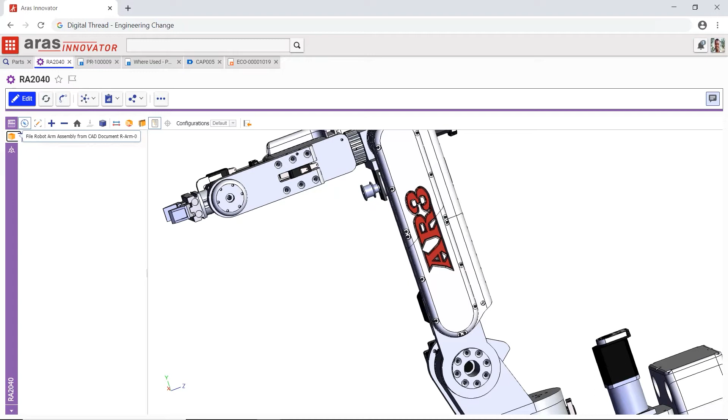Today, we're going to be looking at a fictional company called AR Robotics, who produces, sells, and services a line of robot arms for a variety of customer applications, including manufacturing, medical, and high tech. This is the AR3 robot arm, and we're looking at the bill of material structure or BOM structure. This concept has been around for quite a while, and most people in product development, including those outside of the engineering group, understand that this view is a relationship from one part to another, connections between parts.

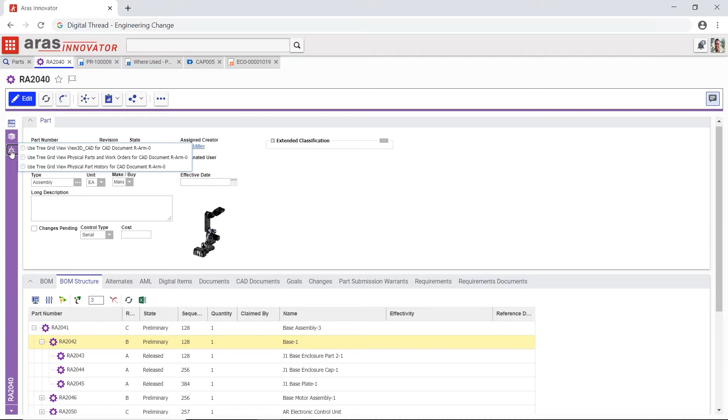Today's PLM systems might establish a few more connections, say from a part to an engineering change, but much of the remaining view of the product lifecycle, including requirements, simulations, maintenance, and quality data, remains siloed away, disconnected, unavailable. Once products are manufactured and deployed in the field, this limited connectivity concept starts to falter, since each serialized item, robots in this case, will eventually get maintenance service and possibly component and software replacements and upgrades.

To successfully capture and present this data for efficient use, the PLM system must track all of this information individually for each physical asset, creating a unique digital twin. Aras has created a platform and applications to allow all authorized users of the system to see each digital twin with a unique serial number and all of its unique configuration and history.

I'm looking at the dynamic product navigator, and I can see each robot arm with its unique serial number. Expanding each subcomponent, I can see serialized sub-assemblies as well as components. In this case, I can see a component that's been replaced with the old serial number and the serial number of the new replacement component.

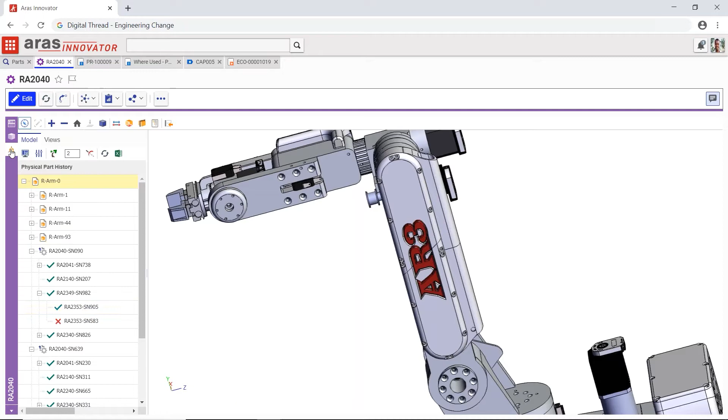Another view of the Aras Dynamic Product Navigator shows the serialized robot assemblies at the customer site with individualized work orders that have been issued against that particular unit. In this case, I can see this unit has had 2 work orders issued. And this work order had a problem report issued as part of its activity.

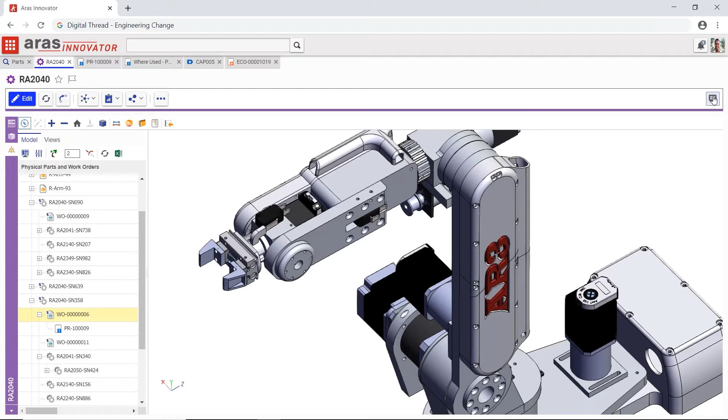Not only can Aras connect data from one piece to another, but it also has the ability to connect a discussion thread with each item in Aras. I'm looking at the visual collaboration discussion thread, which contains information such as rich content like markups, names and dates of the people that left the comments themselves, and even links back to items within Aras.

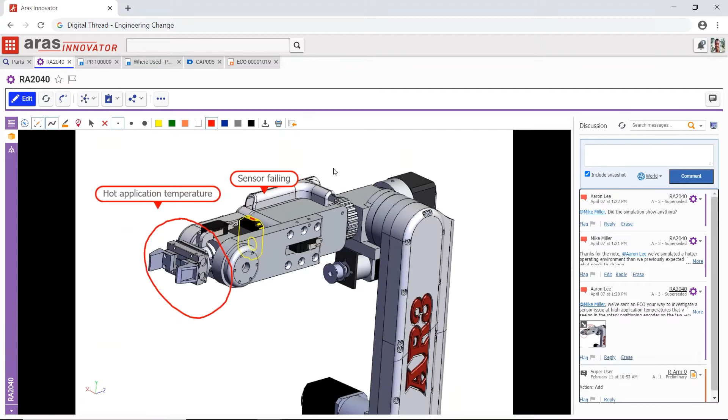I'm looking at this view here, and I think I want to leave a markup of my own. So I'm going to go to my robot assembly here. I'm going to stretch it out a little bit so I can see what I'm looking at. I can see these 2 components are the ones that I think I want to leave a note for. I'll go into markup mode. I can leave my note here. Let me put a couple leader lines in here to show exactly what I'm talking about.

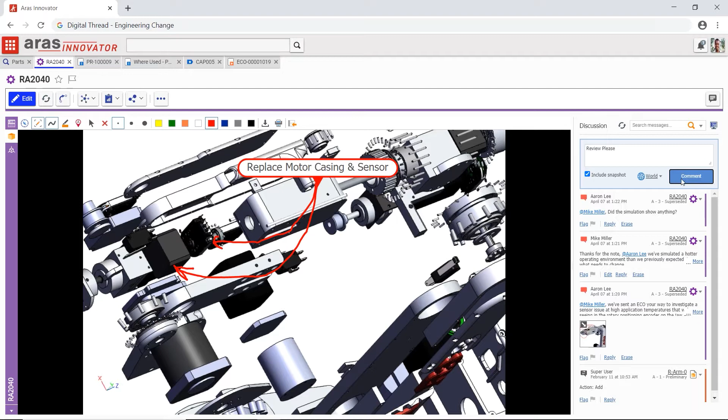I can leave a comment. When I leave this comment, it becomes a permanent record within the Aras Innovator system, connected directly to this item. And now you can see my comments have been left here today with a timestamp.

Let's go back and take a look at that problem report and use this as a kickoff point to see how I can look through the digital thread in Aras. I see my problem report here, and it's showing some errors on the diagnostics. The where used function shows that that problem report is connected to a corrective action plan. This corrective action plan is at the heart of the quality management system in Aras.

This has information about the problem description, the cause, effect, and eventually the effectiveness of the actual corrective action plan. It also has links to quality events, including problem reports. This is the problem report that brought us here, as well as other problem reports that have been submitted against this particular corrective action plan. It has containment events, such as hold notices and stop ship notices to stop the problem from continuing.

Analysis has root cause analysis, which I can see shows that there's a sensor overheating investigation ongoing. Corrective actions, including a rework order, and preventative actions, including ECOs and potentially quality documents getting issued to prevent this issue from occurring in the future.

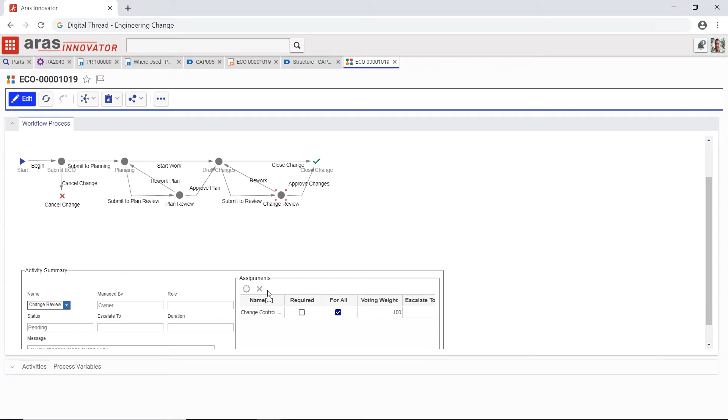Viewing the sign-offs lets me see a workflow history report showing each activity, its current state, who it was assigned to and completed by, how that person voted, in other words, which pathway through the workflow it took, and a time and date stamp of when each activity was completed.

Further down in the ECO, I see the impact matrix. This shows all of the affected items within this engineering change. First, I can see the rotor motor assembly being removed and being replaced by another assembly 2449, which is the replacement motor assembly. This new motor assembly has a new surface treated casing as well as a higher temperature sensor within it.

This impact matrix I can also see has automatically set the upper level parent assemblies to be revised. I can also see here that the electronic control unit has also been set for a revision. And within that electronic control unit, I see there's a piece of software. It's important that the software is connected with the electronic control module.

Within the software item itself, there are connections to other included software, such as firmware in this case. And generally, the software item itself is usually built externally to Aras, but I can see that there's live links within Aras to the repositories for the software. Those can include things like Jira, GitHub, or in this case, Bitbucket.

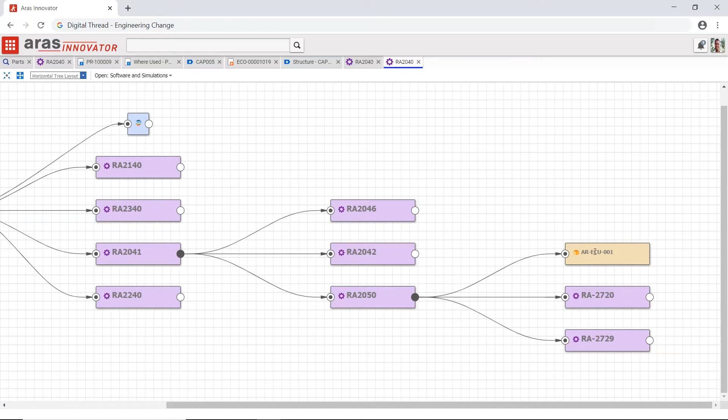Graphically, I can see those connections in the Graph Navigator view. I'll open the software and simulation view, and I can see my robot arm assembly, expanding this out to subcomponents and subassemblies. And further down, I can see the software item that I looked at earlier, and I can open that item directly from this view.

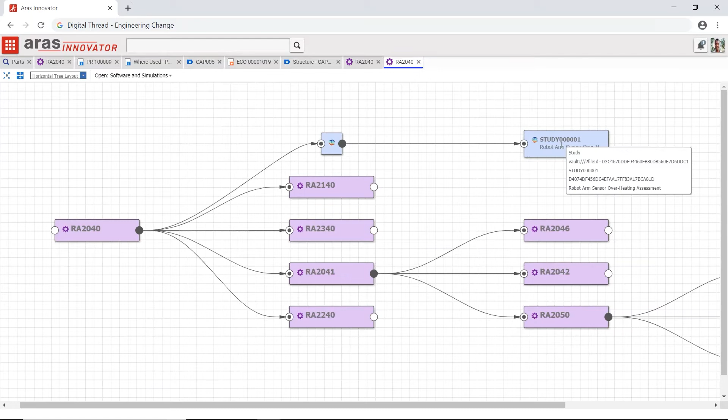Also in this view, I can see that there's a simulation study that was performed. I can get more information on this simulation study here. I can see this study is linked to some of the requirements that were originally used to develop this robot arm, as well as a link to the simulation itself that was done initially for this first design. Let's take a look at what's in the simulation.

The simulation is a thermal simulation. I see the link to the design that was used for the simulation. We can use design variables, in this case, such as the casing surface treatment. Here I see it's set to a value of polished. Environmental variables, such as the application temperature, with values and units that are specific to that item.

And finally, the results of the simulation are captured in this view as well. And I can see that the sensor temperature at the simulation, the result was 69 degrees Celsius, which, based on the requirement values of greater than -25 Celsius and less than 75 Celsius, that target was automatically set as true, meaning the target was met.

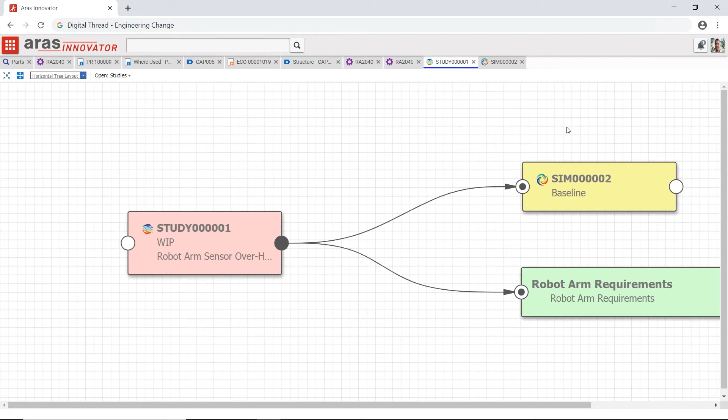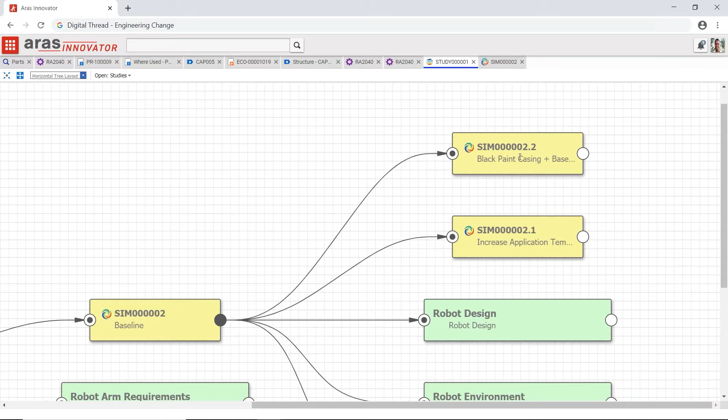Simulations are rarely created from scratch. And with our overheating problem, there were several other simulations run. One that changed the casing coating to a black paint, and a simulation that ran with an increased temperature.

Looking at the increased temperature simulation, I see that the environmental variable, the application temperature, was changed from the original value of 130 degrees to 220 degrees. And the result at the sensor temperature was 154, which means the target was not met. And so that was set to false.

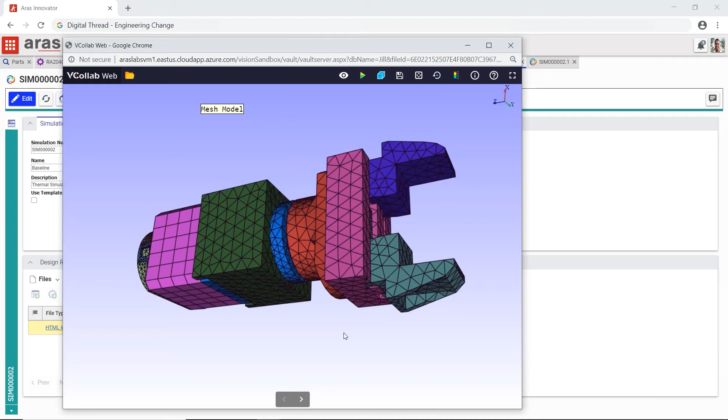I'm also able to see in the simulations the graphical results files, which include things like the meshing that was used to run the simulation, as well as the results files showing graphical temperature representations color-coded for both the gripper arm and the sensor itself.

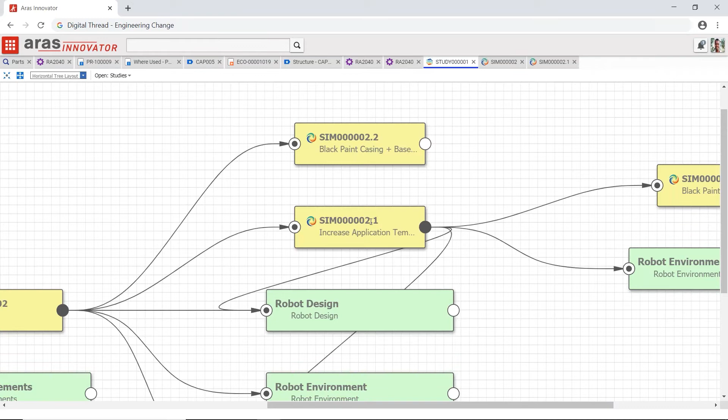Finally, those two new paint casing coatings, as well as the increased application temperature, were combined into a simulation where I can see the new surface coating is now black paint, changed from polished, the environmental variable from 130 to 220, and the results were met and set to true.

All of that information can be viewed in the simulation compare document, which summarizes the results of all of the simulations, including the environmental and design variables used to run the simulation, the results of the simulation itself, and whether or not the target requirement was met as part of that simulation run.

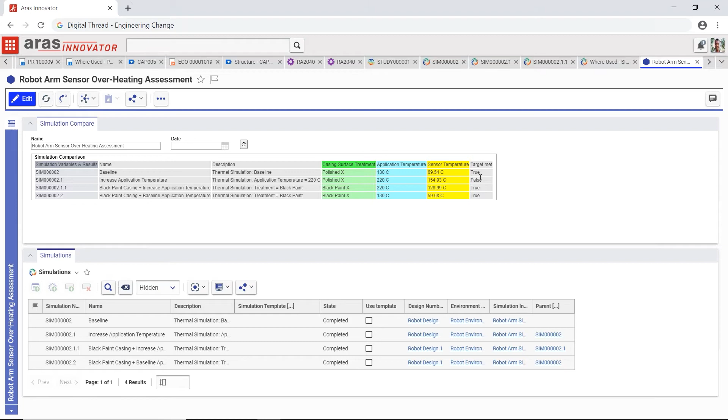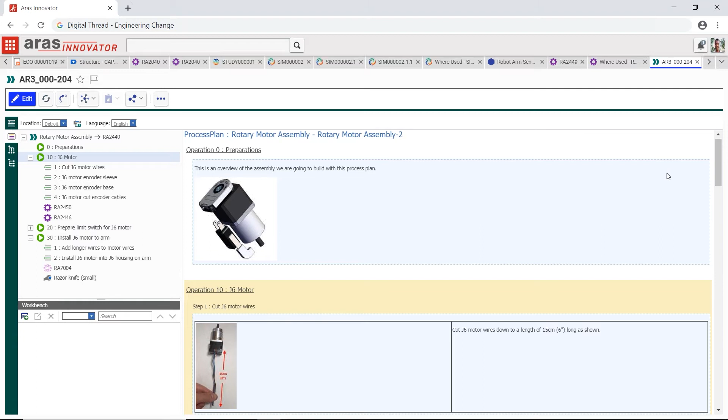And finally, I have the actual manufacturing plan itself, which includes operations, steps, parts, can include phantom assemblies, tools, and using the workbench, I can add even machines, documents, or personnel skills. This manufacturing plan is directly linked to a work document that's generated automatically from the items in the manufacturing plan. You can see that each time I click, it goes through to the work document itself.

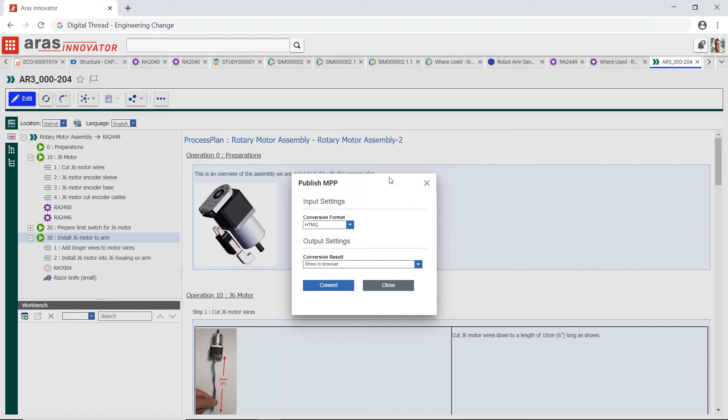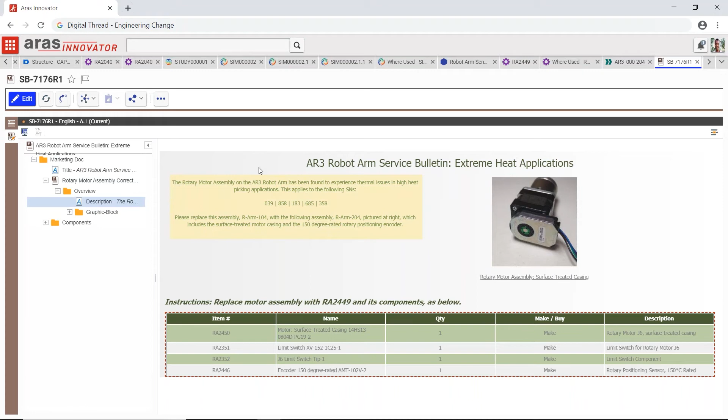These work instructions can easily be published to a PDF format or even to an HTML format that can be served out directly through a wireless connection to a handheld device on the plant floor. This new motor is also linked to a technical document, which uses several of the same components, such as images and BOM structure from the manufacturing plan. These items, all linked back to the part, can all be traced back to the engineering change order to understand when and why that change was made.

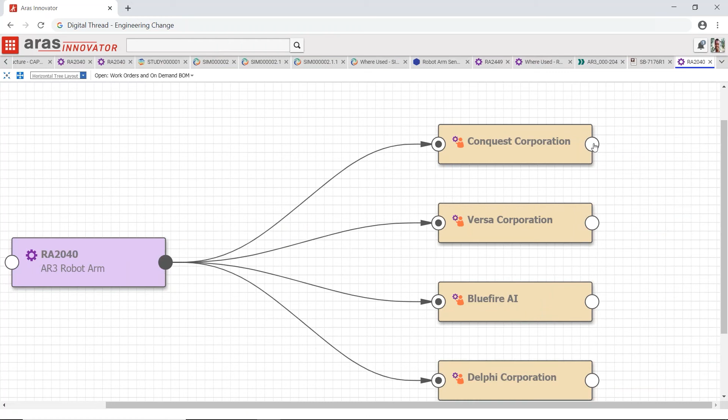Finally, I have the ability to see my robot arm and traverse through each customer that has a unique serialized robot arm. And those serialized robot arms can further be traced to the work orders that have been issued against them, and whether those work orders have been opened, have been closed, or still remain open. And beyond that, traced to the actual component parts that were used as part of the service that was done as part of that work order.

Engineering changes, information. You'll notice that I didn't search for anything while doing this entire demo. Everything I showed was connected with the digital thread inside of Innovator. This digital thread within the Aras platform will ensure that all of the data related to your product is connected and readily available for you to take action. Does your platform have the digital thread?

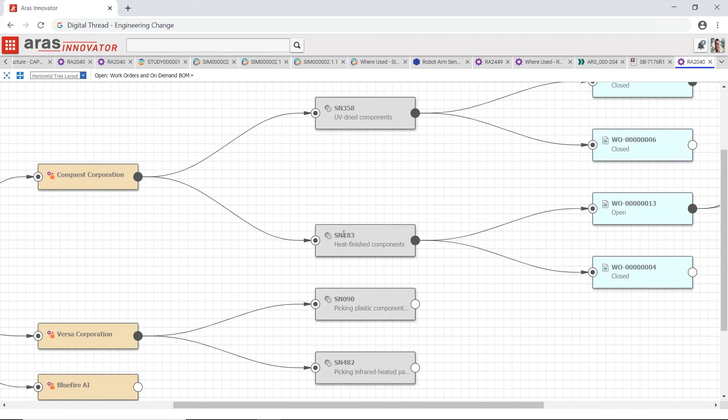In other words, in the graphical navigator, maybe I can pop it up on the screen here. What appears here and the connections between those are defined by the view definition, and the view cards define what appears in this box, how big the box is, what color the box is and things like that. It's really the administrator's responsibility to define all that. That's not a user function in Innovator. I suppose it could be allowed to be defined by users; it's not hard, but it's not trivial.

All of that is explained in our configuration class that's included for subscribers. So it's not very secretive or unknown, and any item type in the Innovator system can have a graph navigator. It only makes sense for things that are connected with some sort of relationship, so you can see graphically what the relationship is between those items.

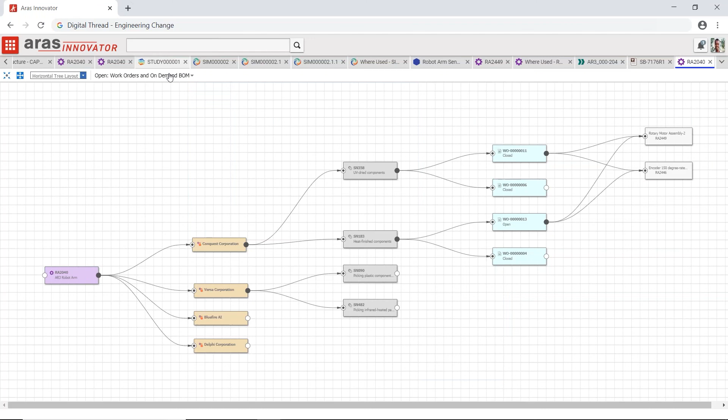Okay, so it looks like we have another question about the software item. Regarding the software item in the robot arm assembly, is that handled as part of the normal engineering change workflow? The ECO that I showed during this demonstration showed a workflow that, let's see how fast I can pop that up. Here. This workflow is CM2 compliant, and it has very specific steps for everything involved in that impact matrix. And I guess the question might be this draft changes step, which goes to the person that's actually going to do the engineering change.

And again, software, hardware and electronics are really three different disciplines. Within the Aras system, it's all assumed that this one person is going to do all three, and that's probably not typically what's going to happen. So this workflow could easily be modified to branch out in parallel so that when start work happens, it goes to three different activities, one for software design, one for hardware design, and one for electronics. All three of those people can coordinate, and then it would branch back together once all three activities have been completed. That's what I think would address that issue.

Okay, great, thank you. Can the Aras digital thread capture information outside of the Aras software? Well, as I showed with the software item, that link to the repository outside of the Aras system was a connection to that. Aras has a federation service that's part of the platform that can synchronize data from outside systems, either on demand or continuously. And there are connectors that can be set up to handle back and forth communication between outside systems, and depending on that communication, the digital thread can lead you to that information.